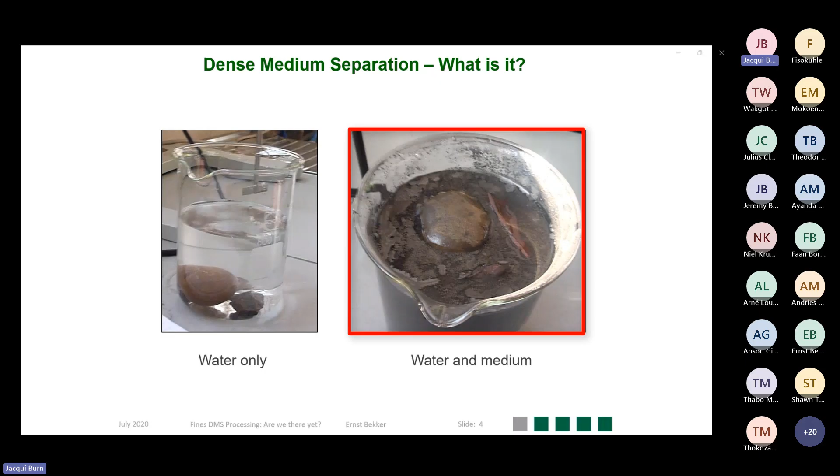Starting off with the dense media separation basics. Dense media separation is where we want to separate heavy material and light material by using a liquid other than water. As the picture on the left hand shows, if you immerse rock in water, it settles to the bottom. However, if you introduce a medium like magnetite or ferrosilicon, it's possible to float the rock as shown on the right hand side.

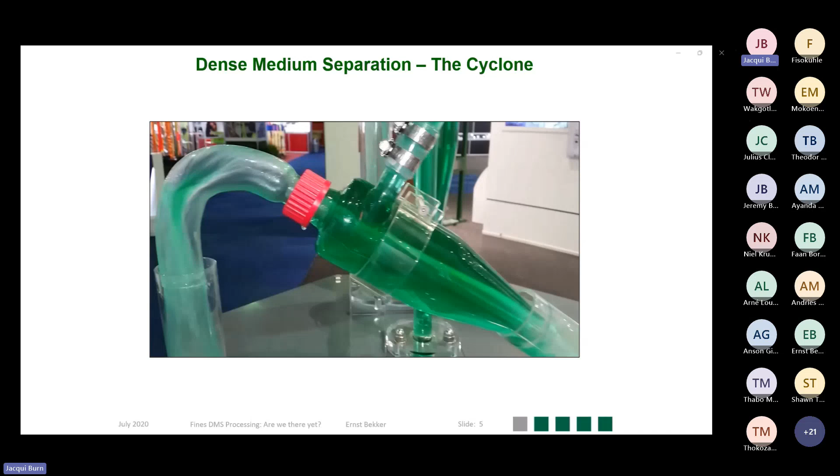In this video, it is an illustration of how the cyclone operates. It's operating on a water-only basis, but inside the cyclone you can see there are some yellow beads, illustrating the amount of time the particle spent inside the cyclone to do the separation. Time is of utmost importance to ensure optimum hydrocyclone performance.

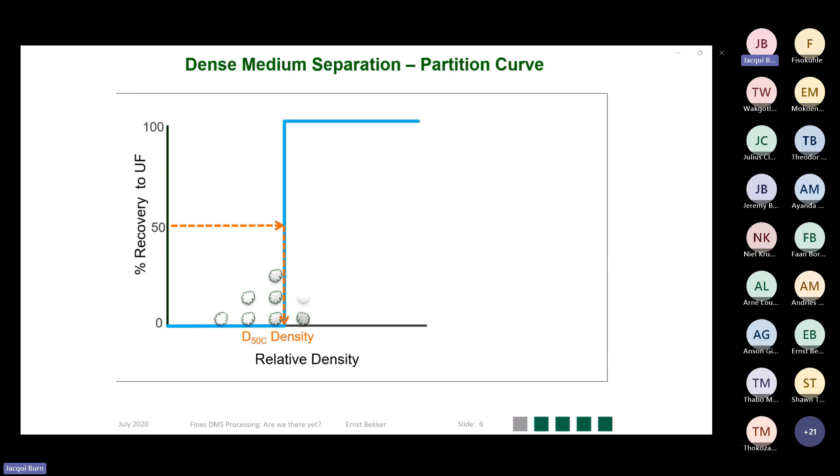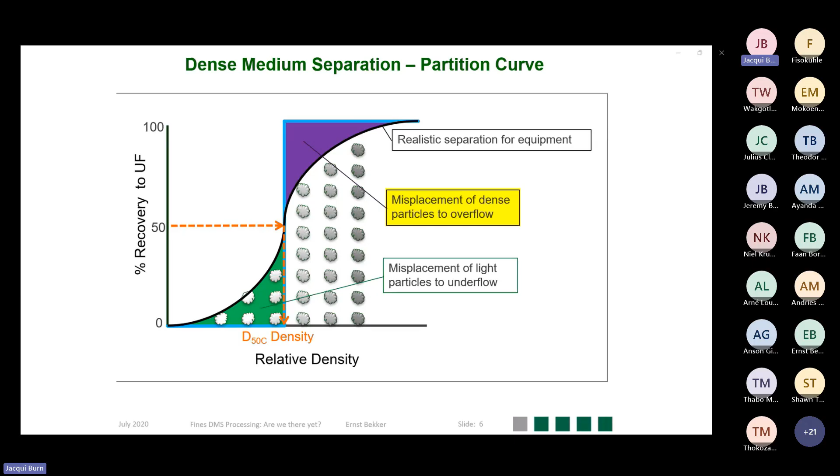Unfortunately, dense media cyclones are not perfect separators. As illustrated in this animation, you get particles that get misplaced, with sinks reporting to the overflow and light material reporting to the sinks. The objective, of course, is to have this S-curve as steep as possible, or to approach perfect separation as close as possible.

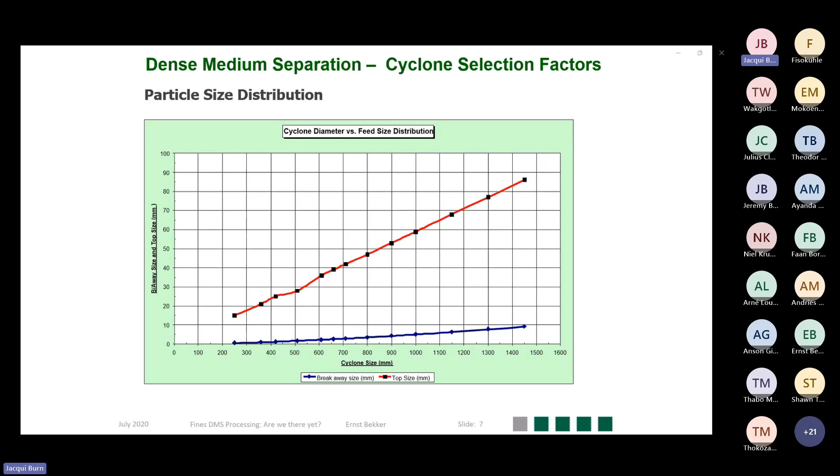In dense media cyclones, one of the factors that play a role is the particle size. There is a top size limitation to ensure there are no blockages taking place, and then there's a bottom size limitation to ensure that we always beneficiate the material as efficiently as possible. The focus of fines dense media cyclones is now on this finer fraction, which is normally not advisable to be treated in large diameter cyclones.

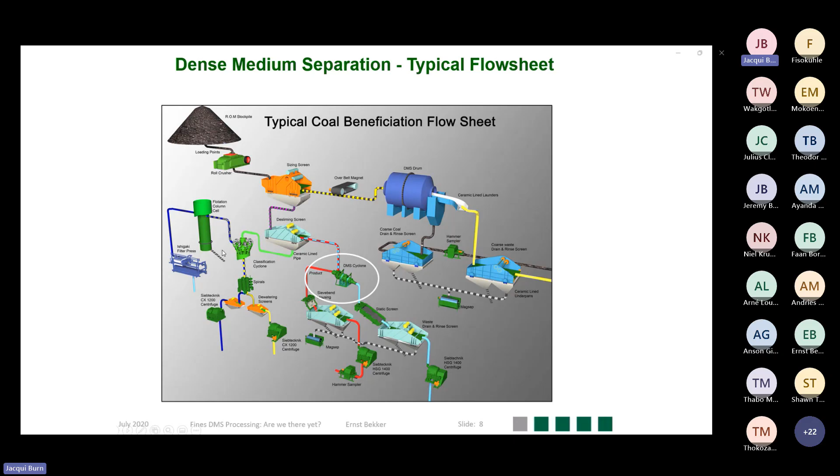A typical flow sheet of a dense media plant shows that the dense media cyclone always forms the heart of the process. On this coal flow sheet, you will see that the fine fraction is reporting to a water-based application, in this example where there's spirals and flotation. The fines dense media separation process is focusing on that territory.

Moving on then to why fines dense media separation. What are the advantages, or why would one do that?

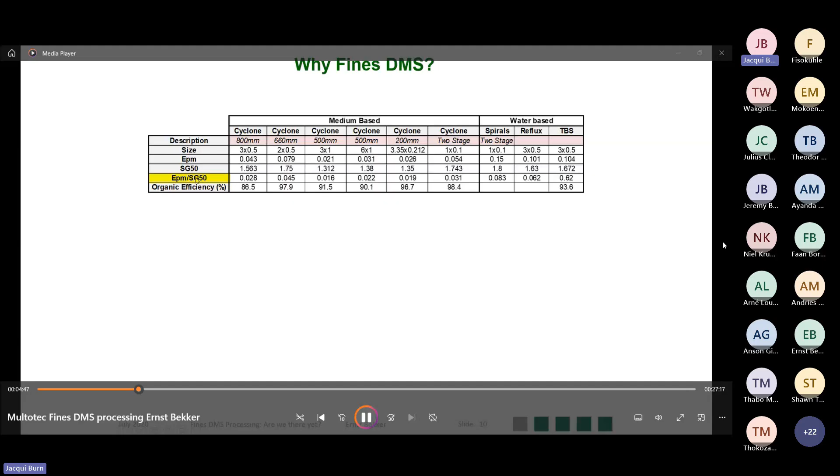The table presented on top of the slide is divided into a media-based section and a water-based section. You will see there is an EP and an EP divided by cut density. The lower the EP value, the better the separation efficiency.

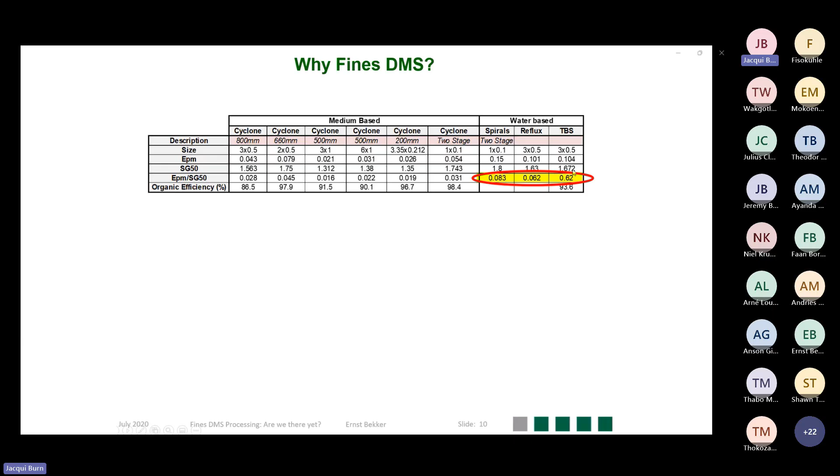If you look at the water-based applications, which is spirals, reflux classifiers, or Teeter bed separators, TBS as they're called, you will see that the EP divided by SG50, normally referred to as the normalized EP, is quite high in comparison with the dense media-based processes.

Why do we want this normalized EP value to be as small as possible? You can get a densimetric ore body where there's very little near density material, as shown on the graph on the left hand side. This small amount of material allows for a poorer efficiency without significant economic implications.

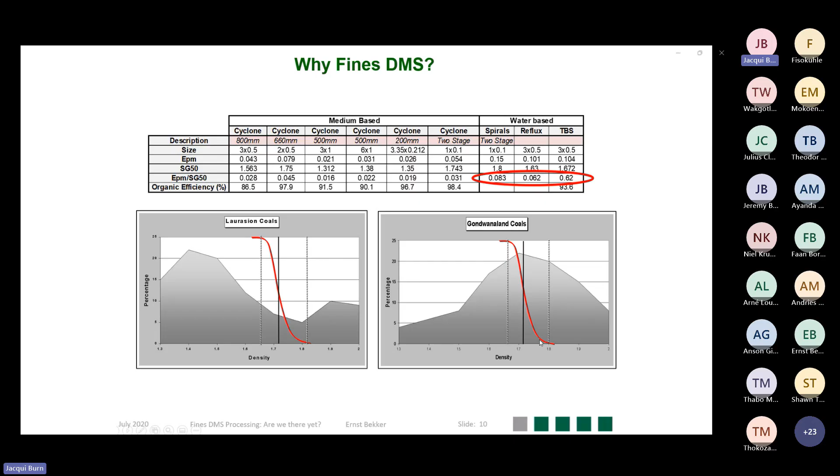However, when you are looking at high near density applications, this S-curve, or the EP value, needs to be as small as possible. That's the territory where dense media, or fines DMS, can play a significant role.

This graph illustrates that the dense media separation process is the most efficient process across a wide range of particle sizes. The particle size is shown on the x-axis, and the normalized EP is shown on the left-hand axis.

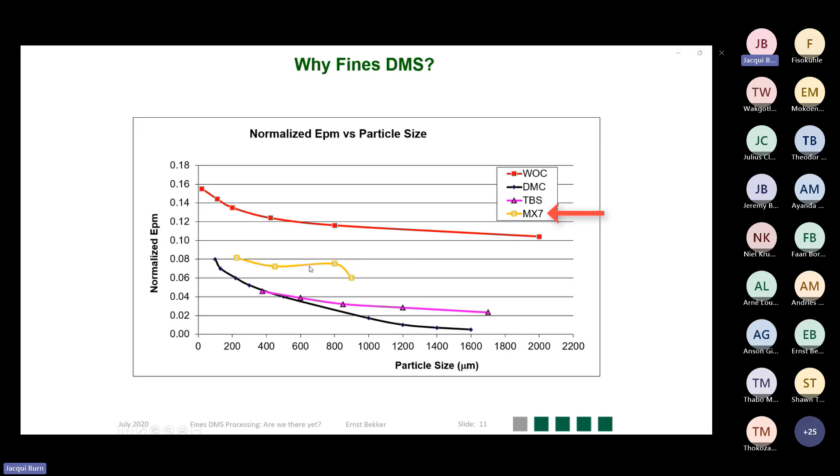So compared to water-only cyclones (WOC), MX7 which is the spirals, and then TBS, the Teeter bed separators, the dense media cyclone performs better.

Next, we move on to some points to consider on fines dense media separation.

First point: what size fraction do you as a client define as fines? Are we talking 3 mm to 0.1 mm? Or 1.5 to 0.212 millimeters? That's the type of information we as suppliers need to be aware of.

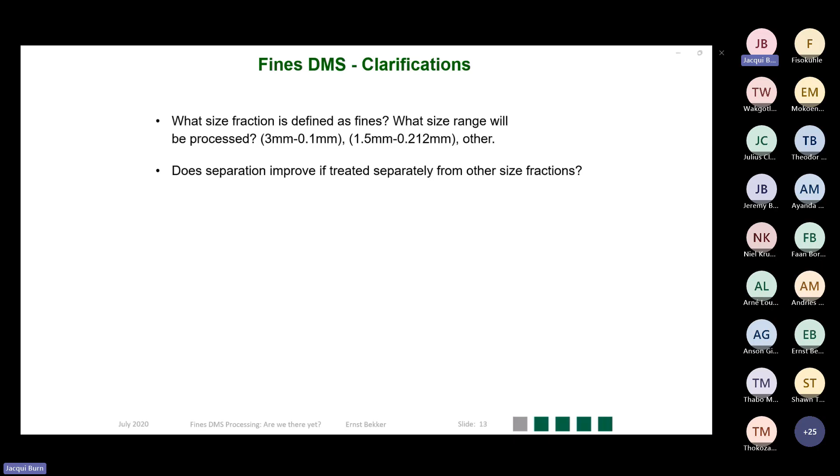Does the separation improve if the fine fraction is treated separately from the rest of the ore body? If so, then there is merit for fines dense media separation. If not, maybe fines dense media separation is not the way to go.

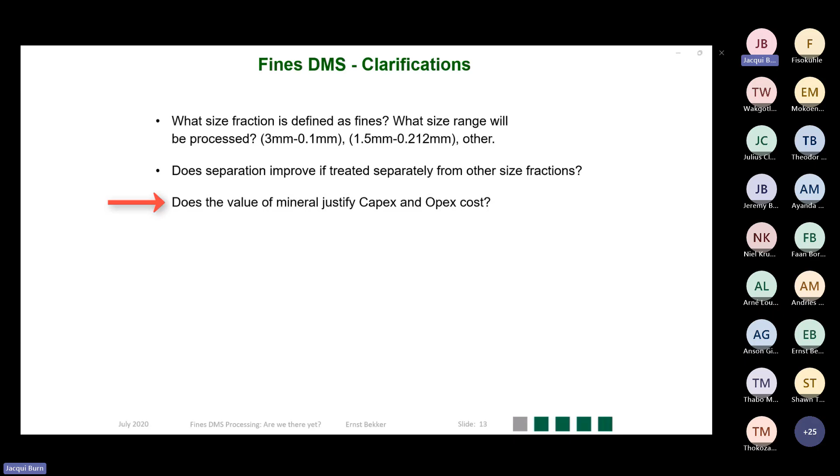Dense media plants are expensive. If there's improvement in performance using only processing fines separately, does it justify the capex and opex required for this plant? What is the expected separation density that one is looking at?

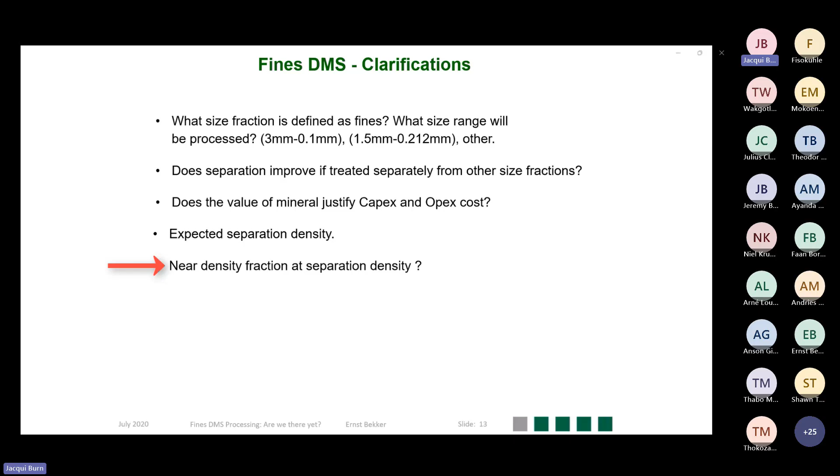The amount of near density material around the separation density - how much is that value? Is there a difference in the particle shape between the coarse and the fines material? Information that we as suppliers need to know.

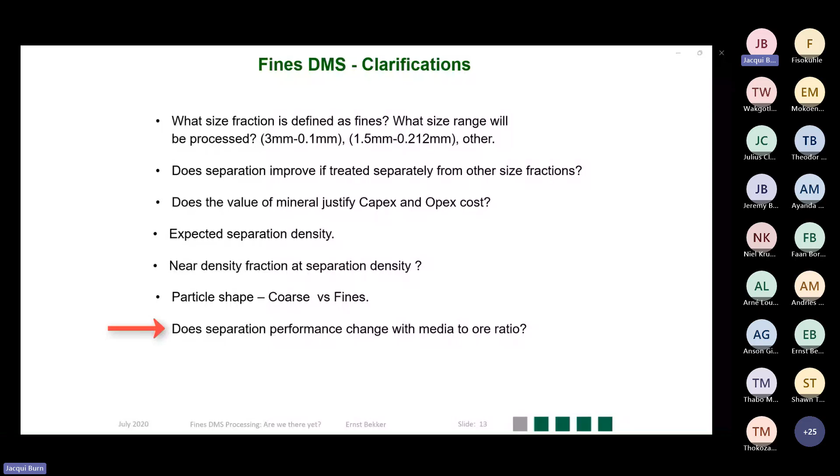Does the separation change if the media to ore ratio changes? If you have that information, make the suppliers aware of that, because that is of utmost importance.

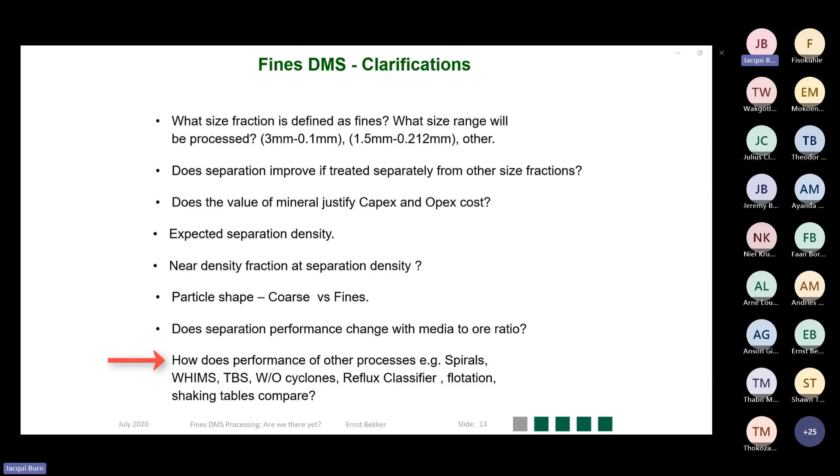And then how does the performance compare against other equipment, like the spiral, wet high intensity magnetic separator (WHIMS), TBS, water only cyclones, reflux classifiers, flotation, and even shaking tables? If some of this equipment produces results similar to the fines dense media separation process, maybe they are the better option from a capital perspective.

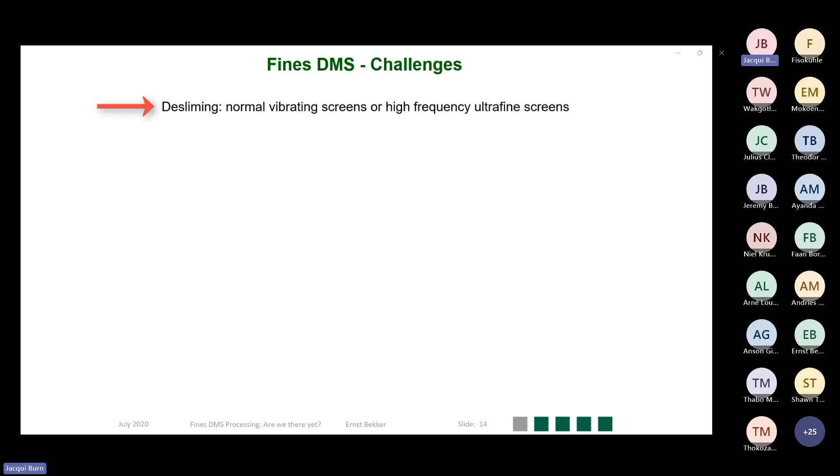Moving on then to challenges that we see so far in fines dense media separation. The desliming activity - most plants currently use normal vibrating screens or high frequency ultrafine screens.

Screens or magnetic separators are used to separate the solids from the media. This is an area where one has to think very carefully, because the screen panel apertures are not always as small as the material processed via the fines dense media process.

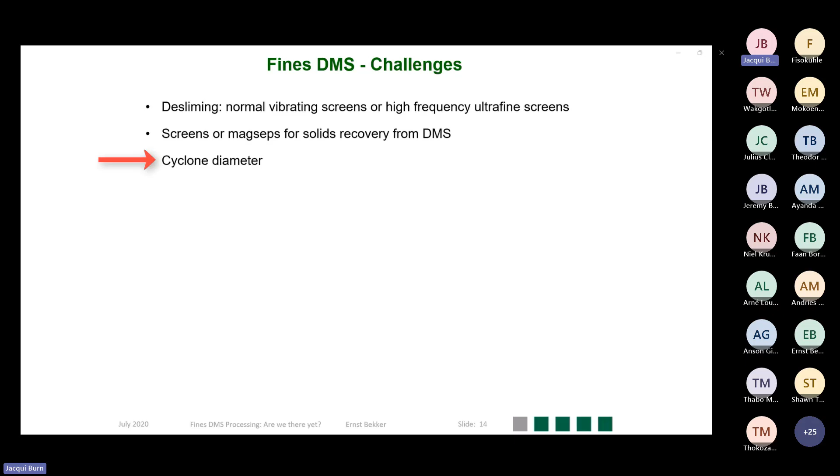Then magnetic separators are a possibility, but if the material is not magnetic, magnetic separators are not going to do the job. What cyclone diameter do we need to use? That's one of the questions always asked in the industry.

The operating head - what operating head do we need to function at? Operating head is related to pressure, and pressure is a function of the media density. So in dense media applications, we talk about head instead of pressure.

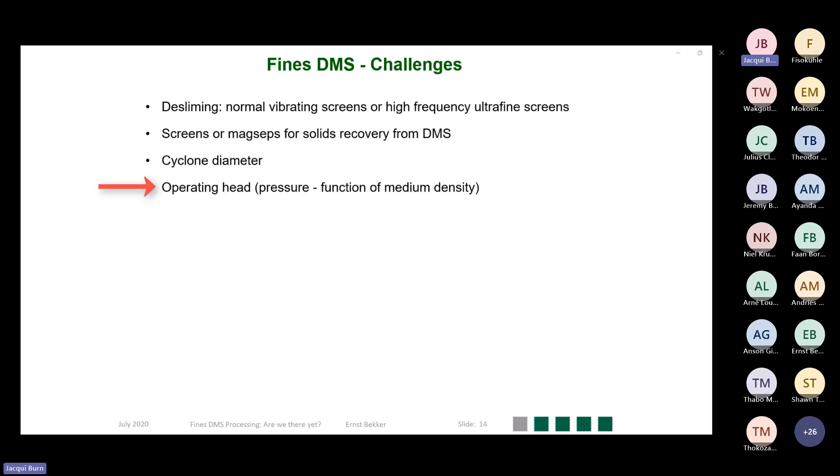What media size and type will be required? What's the fineness of the media that would be the best option? This is information that's not always available up front.

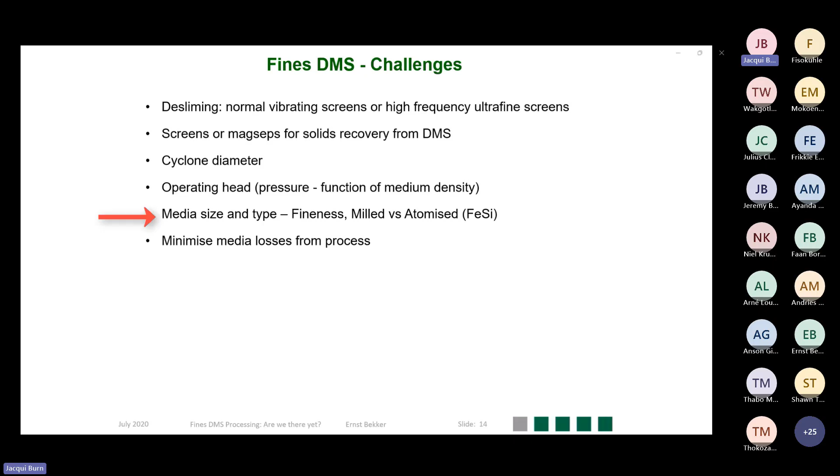How do we minimize the media losses from a fines dense media separation process? The separation density - is it the standard type of density or is it the ultra high density? Ultra high density is defined as densities above SG 3.8 or RD 3.8.

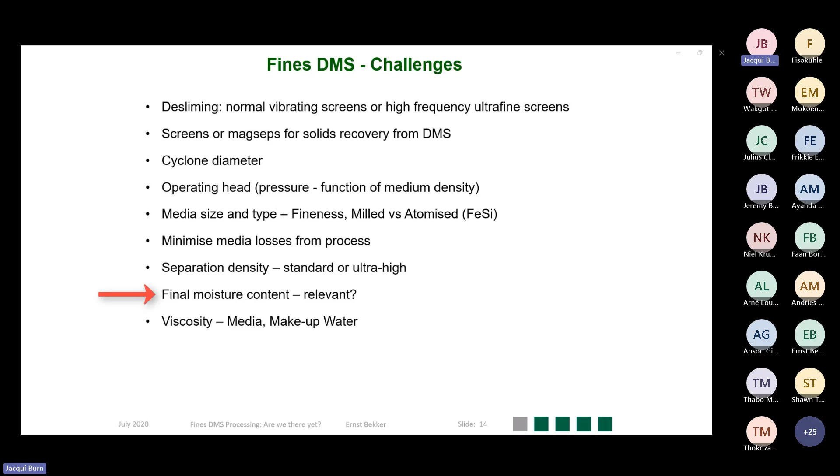Is the final moisture content of the fine material relevant? Viscosity depends on the type of media and also the makeup water. If the makeup water contains some slimes, that can result in viscosity problems, which can have a detrimental effect on fines dense media separation.

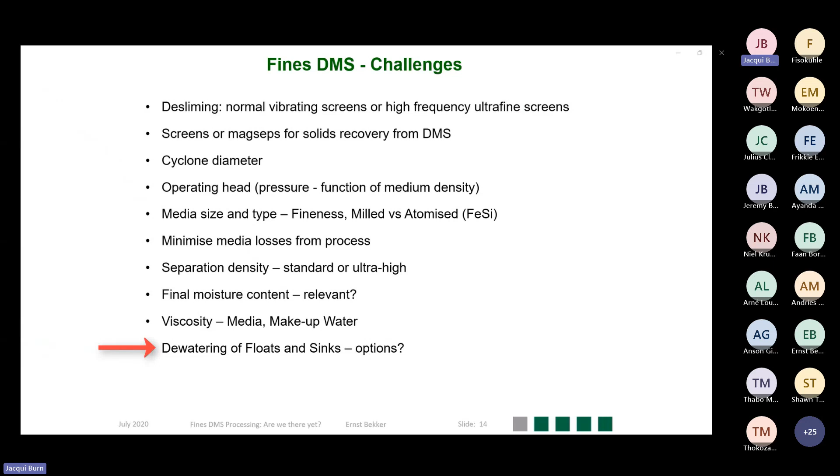Are we going to dewater the floats and sinks? What options exist to dewater that if we want to consider fines dense media separation?

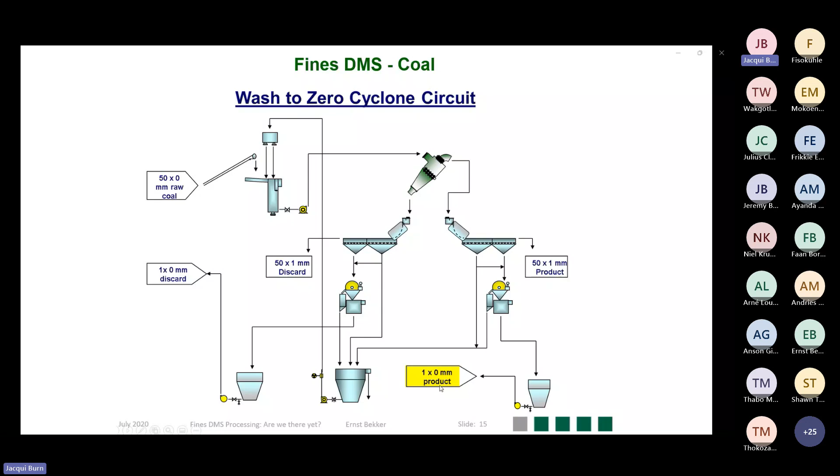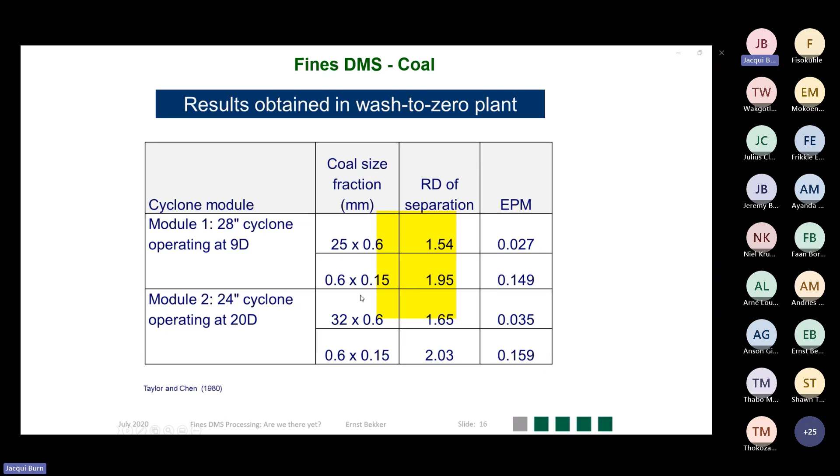The results produced did not look too promising, although we could see that some separation was taking place. If you look at the EPM values, remember the smaller the value, the better the separation efficiency. If we look at the finer fraction, 0.6 to 0.15 millimeters, the EPM values were relatively high, so that was not optimal, but it indicated some separation did take place.

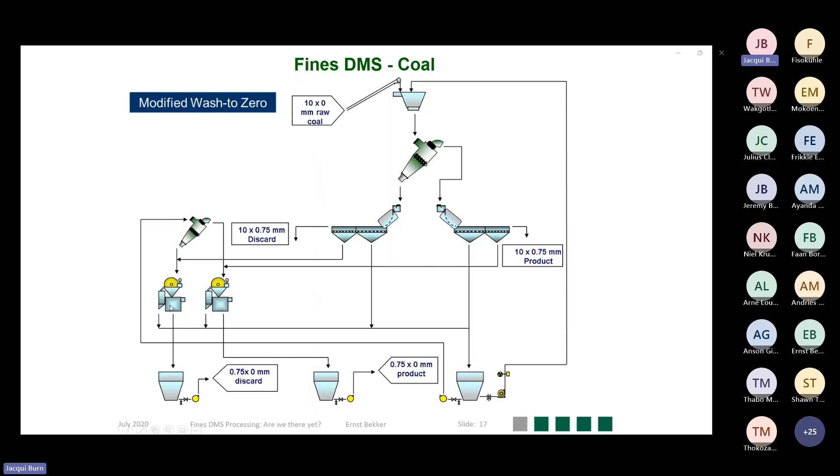There was a modified wash-to-zero process, where the floats of a normal dense media cyclone went through the drain section of the drain and rinse screen into a separate tank and then got pumped to a second cyclone. This cyclone produced a floats and a sinks stream. Both streams went through individual magnetic separators, and the floats magnetic separator effluent became the final fines product, while the effluent of the sinks magnetic separator became the discard.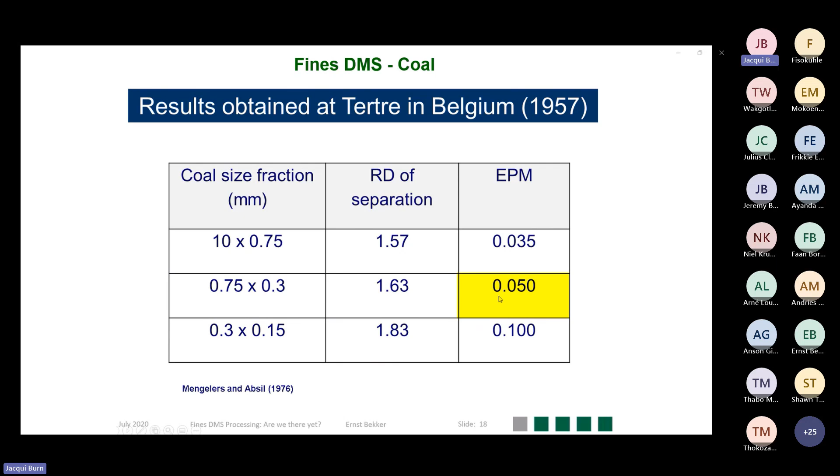This yielded an improvement in the EP values. As one can see, we went from 0.14 down to 0.1 on the fine fraction, 0.3 millimeter to 0.15 millimeters, and 0.75 millimeters to 0.3 millimeters, the EP became 0.05, which is actually quite good.

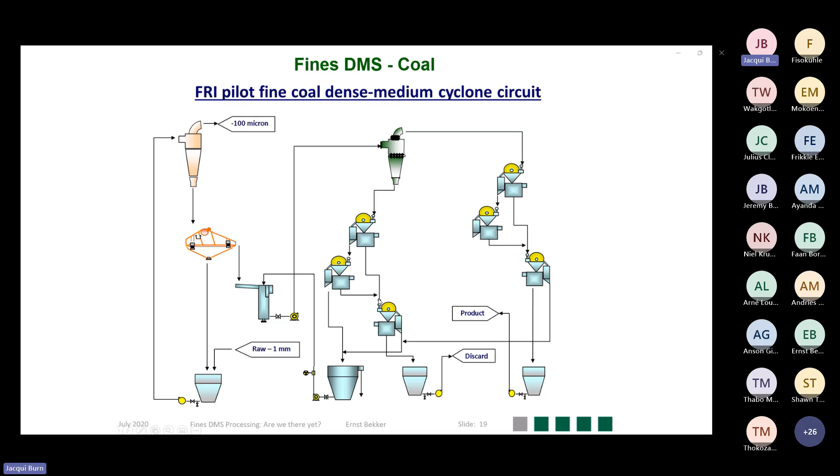The Fuel Research Institute of South Africa then went further and built a pilot plant where -1 millimeter material was introduced to the process. It got deslimed via a hydrocyclone at 100 microns, and the -1 millimeter plus 100 microns was then fed into a dense media process. The cyclone's float and sink sections went to individual 3-stage magnetic separators to produce a product and a discard. The results from the different test runs indicated that very good EPM values could be achieved.

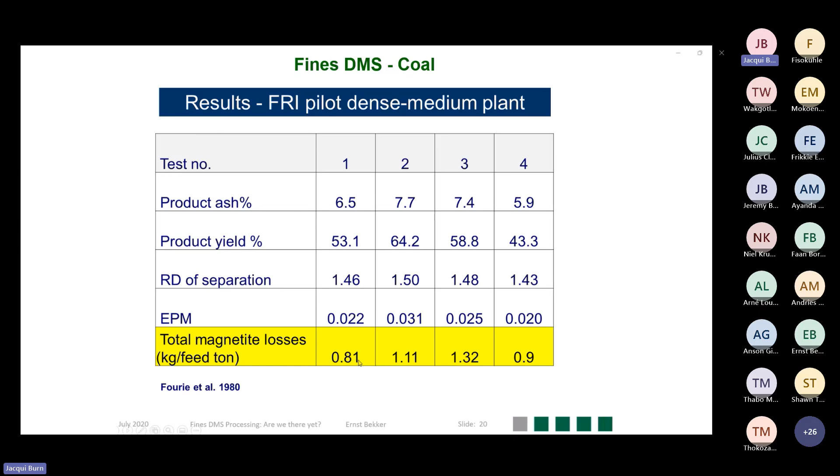Also take note of the magnetite losses experienced on this process. They are quite low, because the standard for magnetite losses in the coal industry ranges between 1.5 kilogram per ton to 0.5 kilogram per ton, depending on the coarseness of the material. So one would expect this fine material to be higher than 1.5, which it is not.

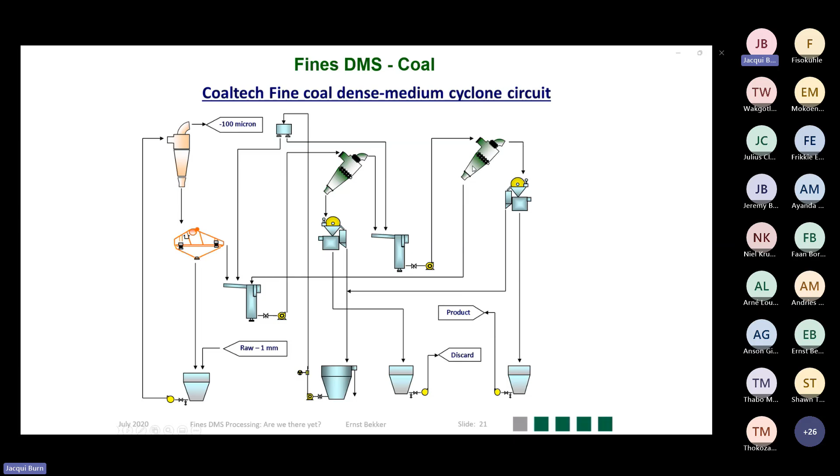Coaltech, a division of the CSIR here in South Africa, developed a different dense media plant. The difference is that it's still the same size fraction treated, -1 millimeter to plus 100 micron, but the difference came in that it was a 2-stage dense media process, where the float section of the primary dense media cyclone got rewashed through a secondary dense media cyclone, and thereby a discard and a product was again produced.

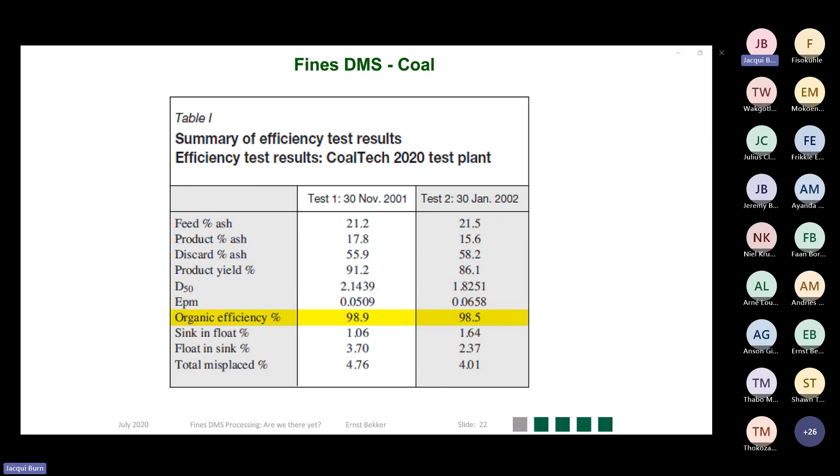The EPM values achieved on this process range from 0.05 to 0.065, which is quite good. What's more significant is the organic efficiencies, ranging from 98.9 to 98.5, which is exceptional for fine coal DMS processes.

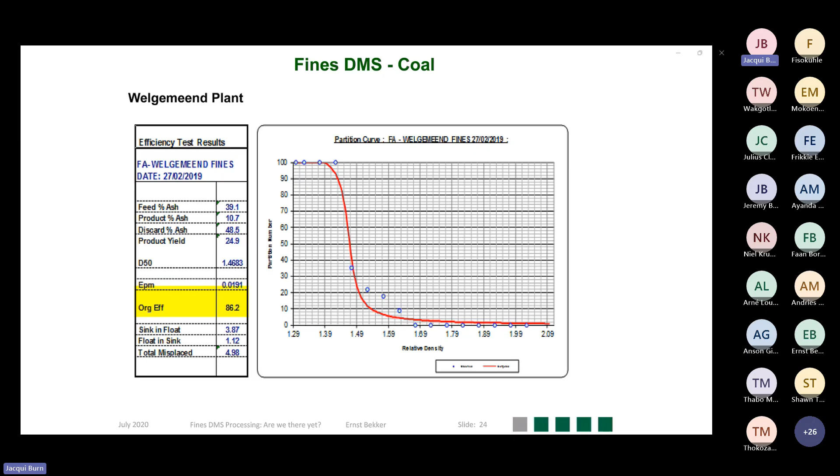The results obtained on this plant indicated EPM values of 0.019, which is very good, and organic efficiency of 86.2%. So in this actual operation, the results obtained indicate that there is room, or scope, for fines dense media separation.

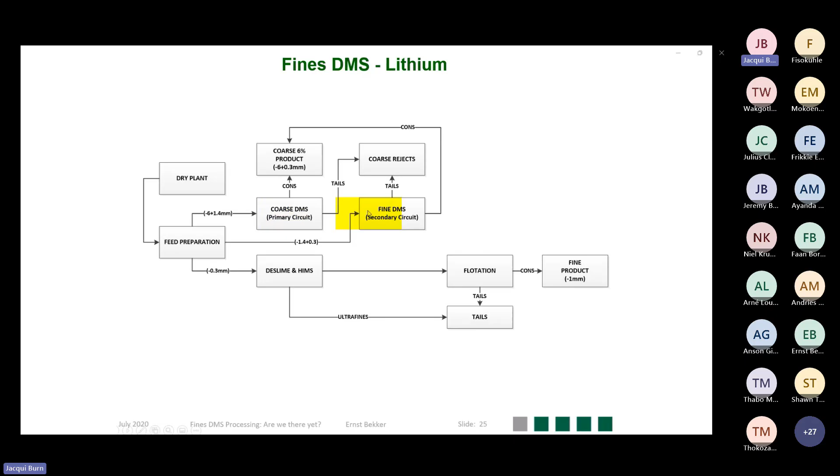It's not only on coal where fines dense media separation is used. Lithium also uses fines dense media separation. In this case, they split the feed between -6mm to 1.4mm and -1.4mm to 0.3mm, separately treated through a coarse and a fines DMS. Iron ore and andalusite are also being used for fines dense media separation. So coal is not the only commodity that at this stage exploits the usage of fines dense media separation.

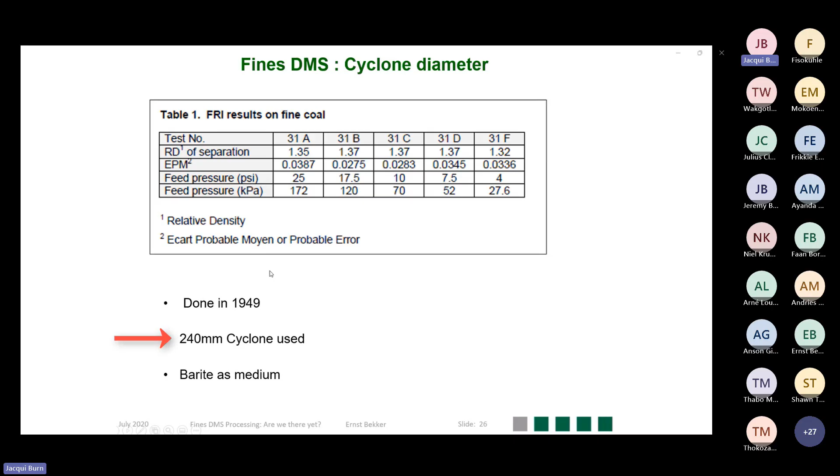Next topic is then the question about cyclone diameter. The Fuel Research Institute results were produced on a 240mm cyclone, and as you can see, EPM values were quite good.

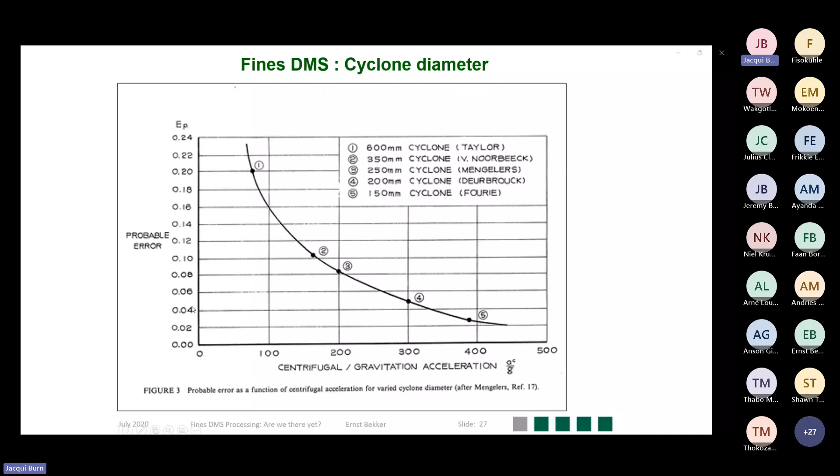Over the years, different tests revealed that as the cyclone diameter becomes smaller, the EPM values become lower. So the trend is to use small diameter cyclones when you want to treat fine material, because that is where the best EPM values are being achieved.

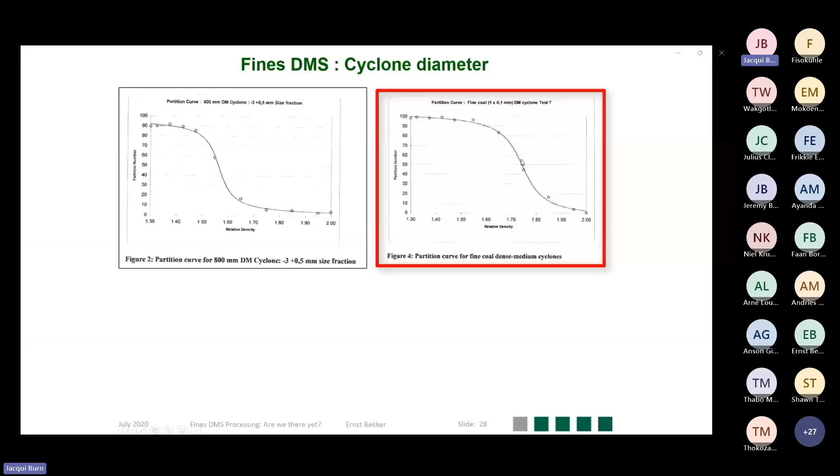Test work done between a 200mm and a 360mm cyclone does, however, indicate that we can maybe not go too small in cyclone diameter. The blue curve illustrates the 200mm cyclone, and as one can see, the larger cyclone produced a better EPM value.

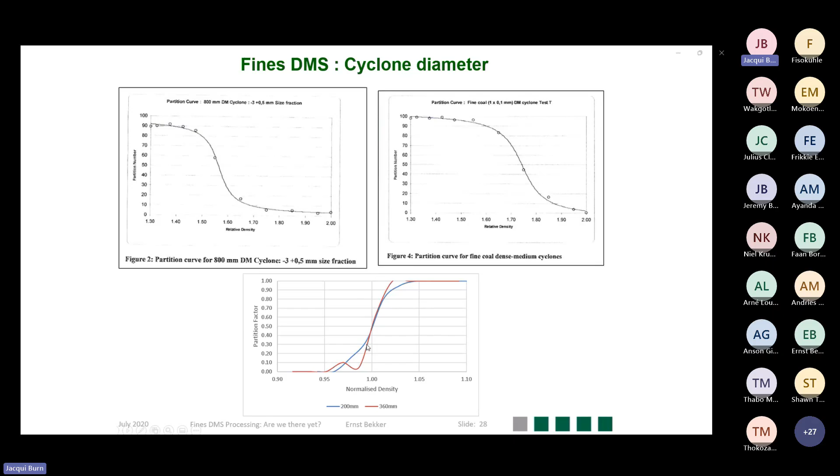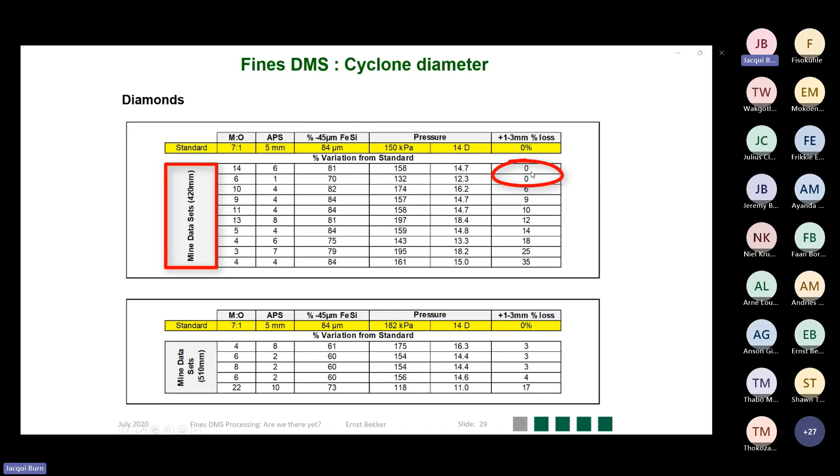In diamonds, they're using 510 and 420mm cyclones. But what is of importance is that on the 420mm cyclone, there were cases where there was no 1 to 3mm diamonds lost, illustrating again that a smaller diameter cyclone gives better efficiency if operated correctly.

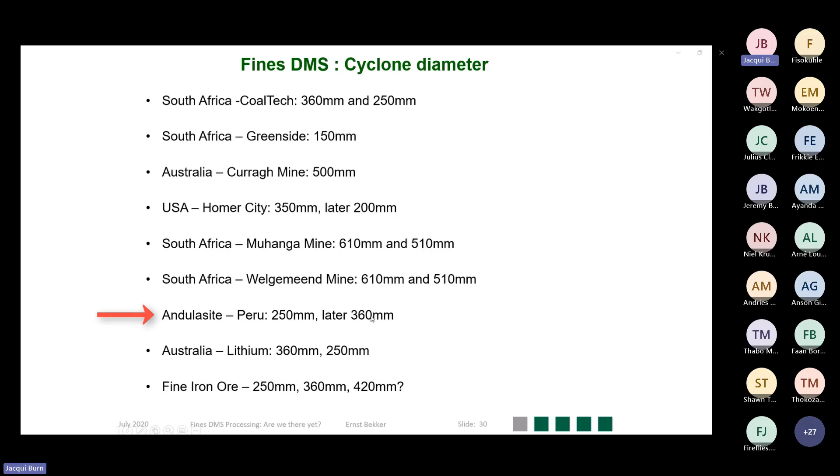So, in summary on cyclone diameter, this slide illustrates the various projects. The CoalTech project used 360mm and 250mm cyclones. In Greenside, there was an operation using 150mm cyclones. In Australia, the Curragh mine used 500mm cyclones. USA, 350, later 200mm. We've now got 610 and 510mm cyclones operating on two fine DMS industrial plants in South Africa. Andalusite uses smaller diameter cyclones again, 250 and 360. Australia, lithium, 360 and 250mm cyclones.

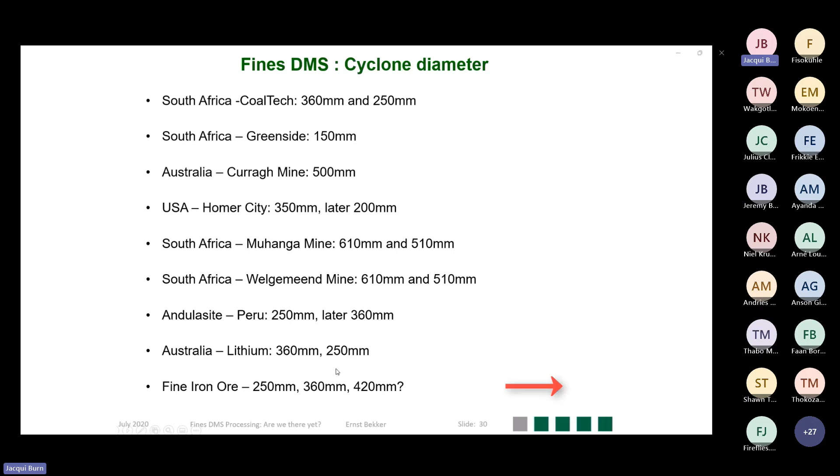And then fine iron ore, 250 and 360mm seems to be the standard. The question is maybe what about 420mm cyclones? So there's a range of cyclone diameters currently being employed or that has been employed on fine dense media separation. It seems that there is no one size fits all.

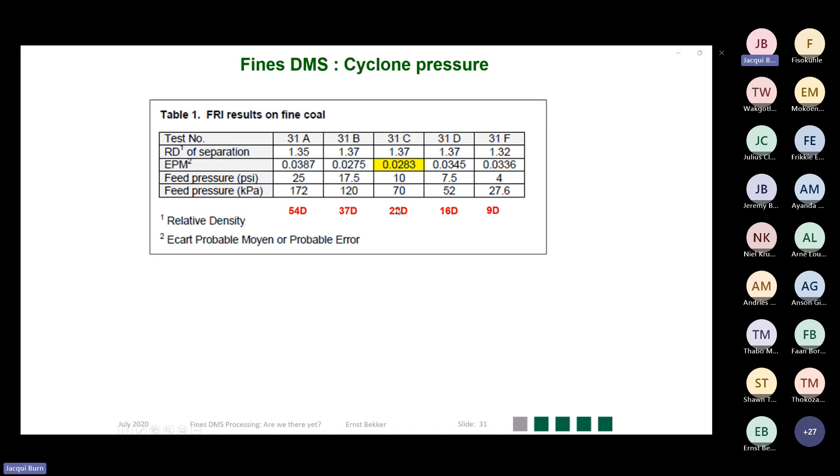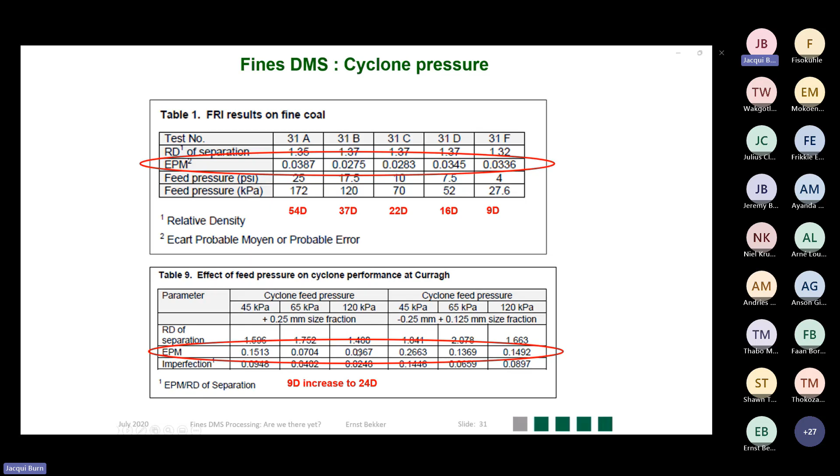Additional test work done at Curragh mine in Australia also indicated a similar trend. 9D up to 24D test work was conducted, and the EP values seemed to improve as the operating head increased.

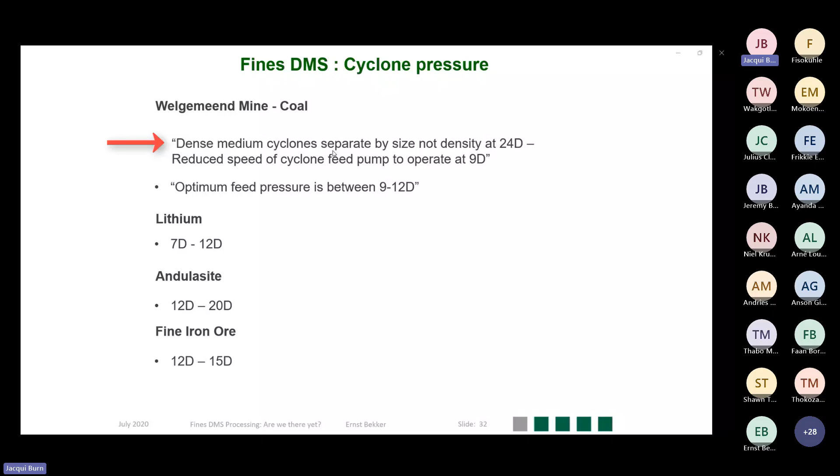On the Welgemeend coal plant, the industrial coal plant currently in operation, the feedback from site is, however, that 9D, the standard operating head for dense media cyclones in coal, seems to be more beneficial than the 24D that people think is required on fine dense media separation. The reason is that they believe the cyclone starts to separate on size at these higher operating heads instead of density. They believe the operating feed pressure should be between 9 to 12D.

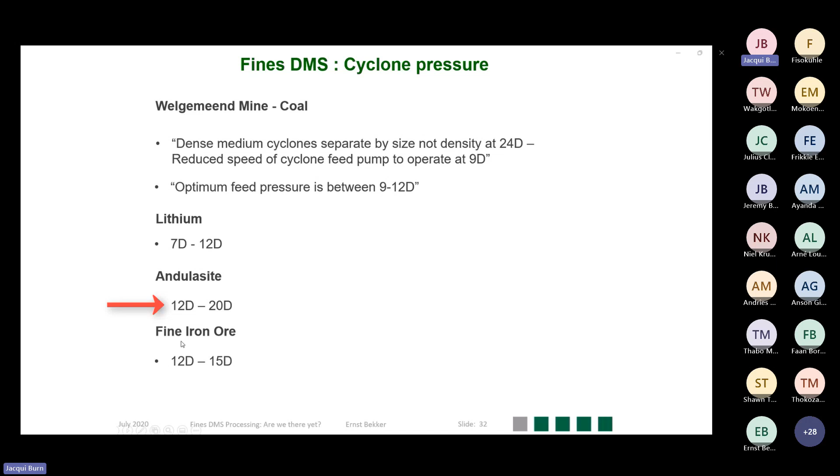On lithium, 7D to 12D seems to be the standard. Andalusite, 12 to 20D, iron ore, 12D to 15D. So earlier test work indicated higher operating heads seem to produce better efficiencies, while as more data becomes available, it seems maybe lower pressures can be employed.

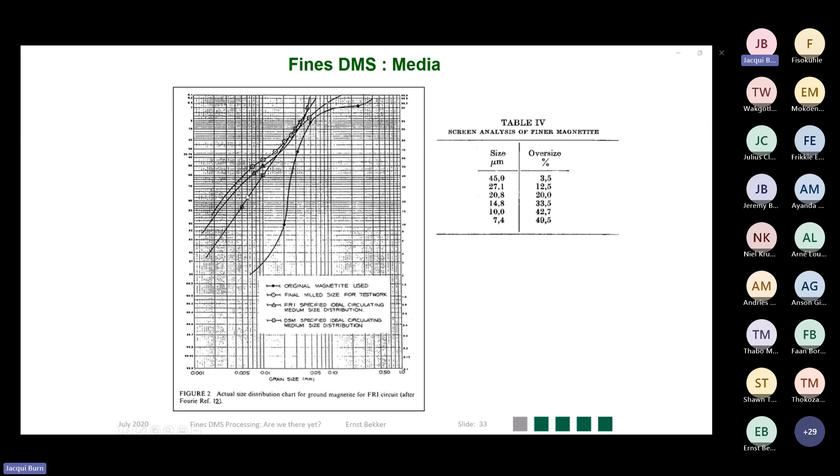Another factor on fine dense media separation is the media itself. The Fuel Research Institute developed their own size distribution on magnetite in the earlier years. On the graph on the left-hand side, one can see what the original magnetite was that was supplied to the process. They milled the magnetite and reconstituted it to form their own type of size distribution, very similar to what was proposed by the Dutch State Mines many years ago.

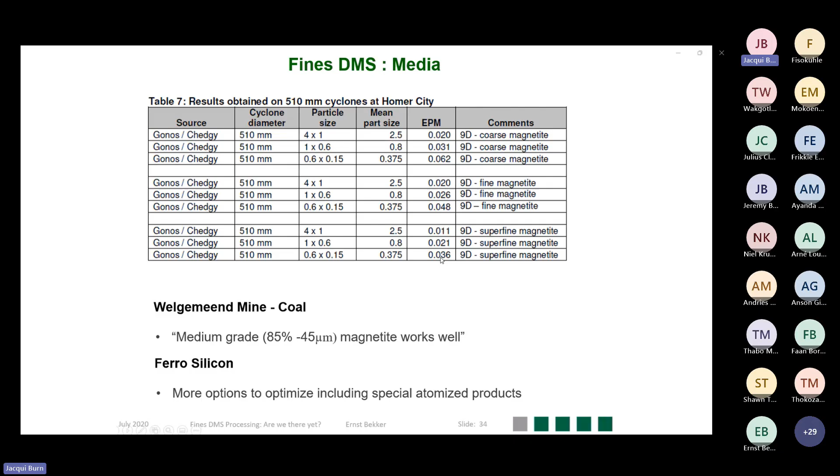On the Welgemeend coal plant, feedback is that the standard medium grade magnetite works well. So again, there's a contradiction. In some applications, a finer media seems to produce better results, and in other applications, the feedback is that the standard media size distribution is acceptable.

On ferrosilicon, you've got a range of media types, so one has the flexibility of changing between fine and coarse media, and that makes it a bit easier. If one finds that one media is not operating correctly, one can switch over to another type of media.

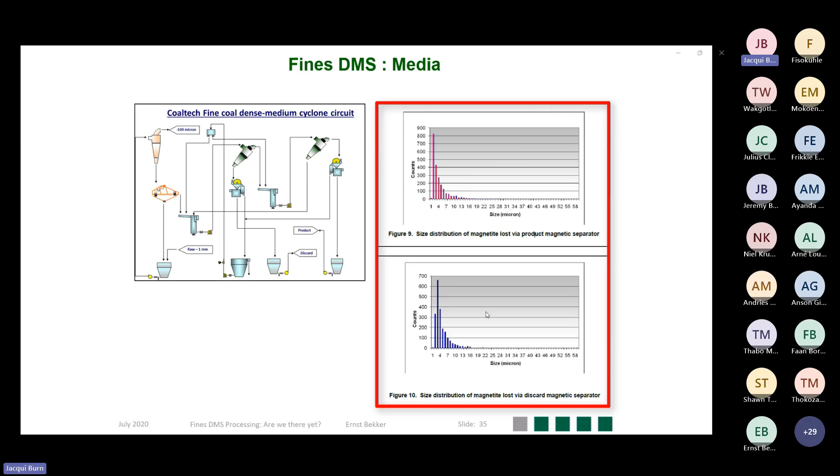Another factor to keep in mind is that the overflow and underflow of the dense media cyclones on the fine processes, especially in coal, now goes through magnetic separators in most cases. And as the graphs on the right-hand side illustrate, both for the product and for the discard, the finer media does get lost from the magnetic separator, as the picture shows, because of entrainment.

So keep that in mind with fine dense media separation. If you go too fine in terms of media, it will, or could, progressively become coarse during operation because of the loss of the fine media fraction.

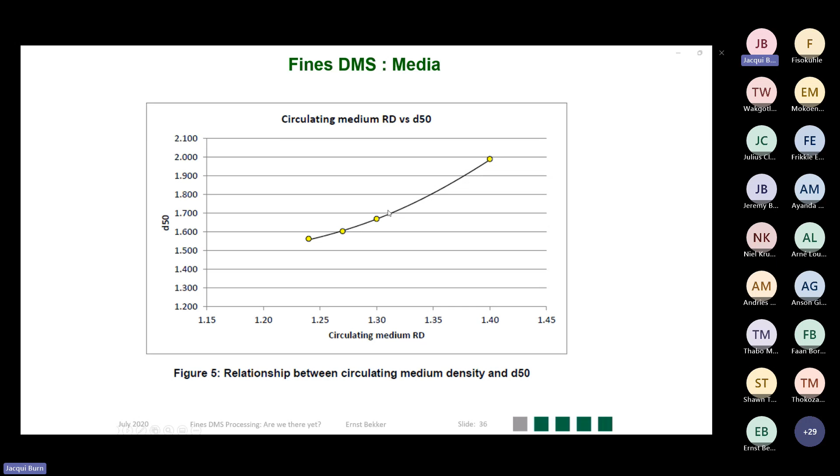That's the circulating media density. As you can see on the left-hand side of this graph, your cut density is significantly higher. We start off at just above 1.55, going up to a density of 2. So it's important to note that there's a big density shift between the operating density and the actual cut density on fine dense media separation.

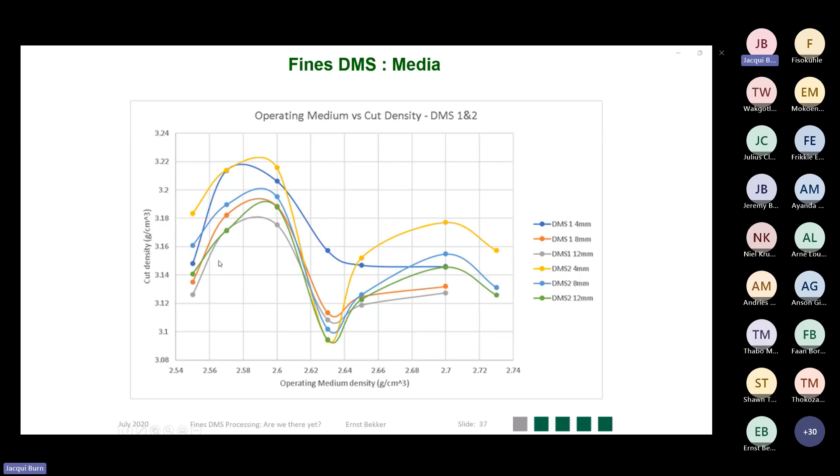Now one can argue that you can just lower the operating density further if you want to reduce your cut density to even values below 1.55. As this graph illustrates, there's a catch. This graph illustrates that as the operating density was reduced from 2.72 to about 2.64, the cut density did come down. But if you reduce the operating density further, the cut density increases again, and that is because of the stability of the media. So there seems to be a limitation of how low we can go with cut densities on fine dense media separation. One of the problems is that we use smaller diameter cyclones in fine dense media separation, and therefore the classification effect on media is more significant compared to larger diameter cyclones.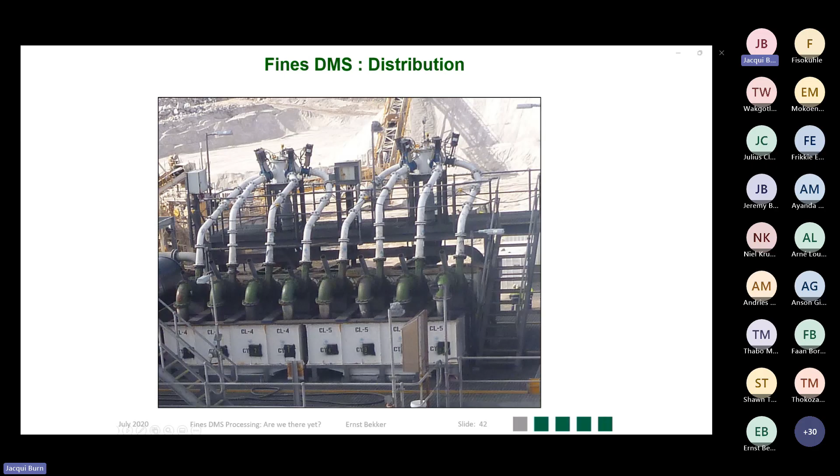There are plants that utilize this concept with multiple cyclones being fed from a common distributor. However, on some of the fine dense media processes, people are feeding a single cyclone. That's where the larger diameter cyclone is coming in. There are no distribution problems that can possibly happen - it's a single feed going into the unit.

So which one is better? Results done on a coal plant where multiple smaller diameter cyclones were replaced with a single larger diameter cyclone showed that going to a larger diameter cyclone resulted in improved EPM values. Test work done on lithium between two cyclones of 420mm diameter compared to a single 610mm diameter cyclone indicated that a single large diameter cyclone seems to produce better separation efficiency as well.

So why would that be the case? Most possibly it's because of the distribution error that can occur using a pulp distributor when the feed pipe design is not optimal. We want as long or as straight as possible feed pipe into the pulp distributor with no bends, and if there are bends, it needs to be as far away from the pulp distributor as possible. But there does seem to be a trend that single cyclones, larger diameter, may provide better results in some cases.

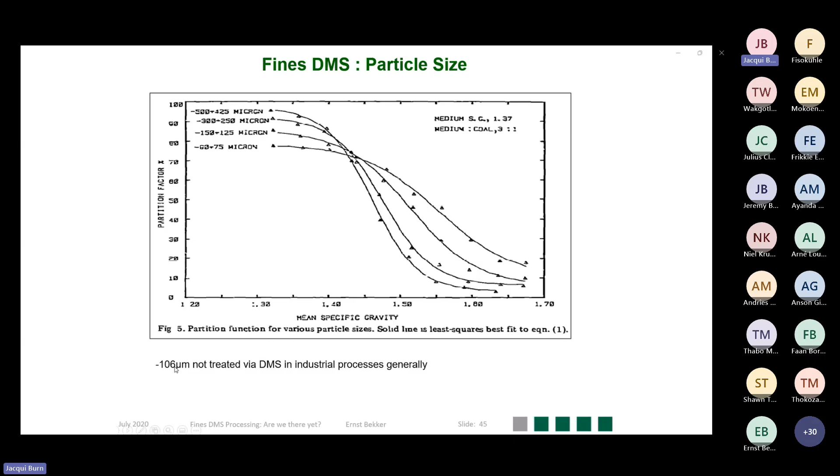Next one is the particle size. What type of particle, what size range do we want to process with fine dense media separation? This graph indicates that there's a limitation - for ultra-fine material, dense media separation efficiency deteriorates as well. So it seems that at this stage the trend is that below 106 microns, that material needs to go to a separate process. This is also illustrated in these two graphs.

The top left-hand graph illustrates the particle size and cut density, and the finer we go, the more significant the cut density effect appears to be. So there seems to be a cutoff where over a certain range we can separate the particles at a similar cut density, and on the finer fractions we are going to separate at a higher density. That could be detrimental for the process.

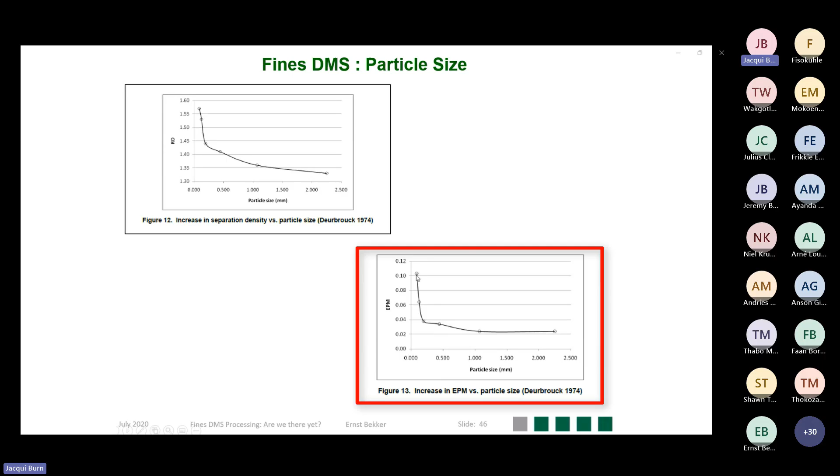Moving on to the EP graph on the bottom right hand side. Fine EP values seem to be more consistent over a certain range up to the finer fraction, and then the EP values escalate, illustrating again the argument to not process the ultrafine material - there are other processes that are more suitable. This was done for coal.

Then there's a question of single versus double stage dense media separation. The Welgemeend plant, which is the operational plant here in South Africa, utilizes a two-stage dense media process.

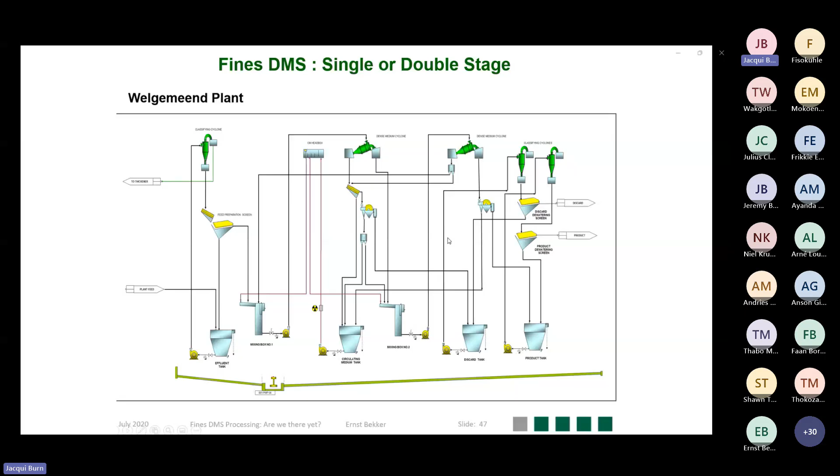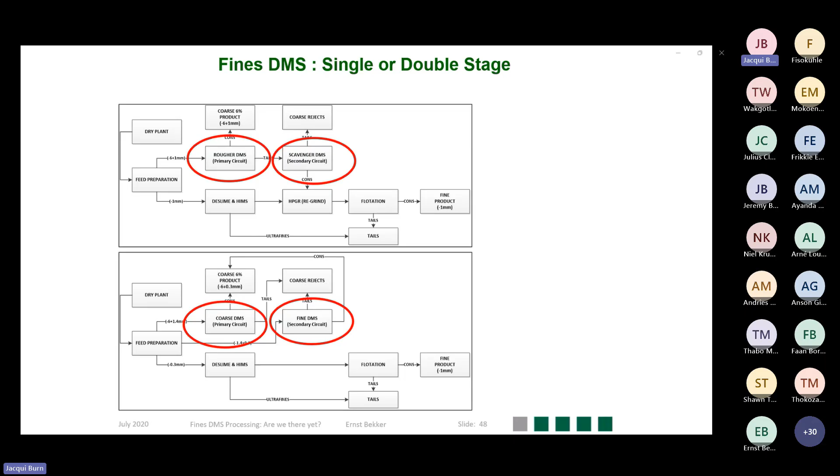On lithium, the standard was using a two-stage process, where you've got a rougher DMS treating 6 by 1 mm material, and then the tails went to a scavenger DMS, which will then reprocess some of the material. There seems to be now a trend that they want to separate the size fraction into a coarse and fine fraction, and then have single dense media cyclones instead of the original two-stage dense media cyclone.

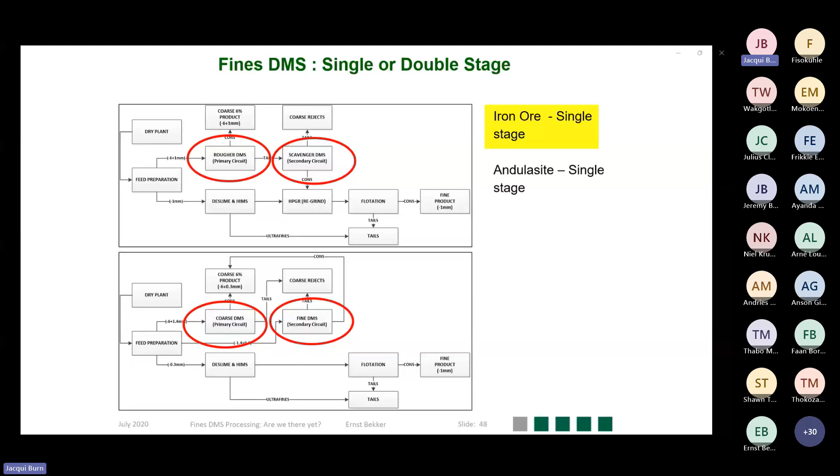The question can be why? I think one of the main answers is the difficulty of operation. Operating a two-stage dense media process is a bit more complicated than a single-stage dense media process, and if you don't get it right, it defeats the objective. Then single-stage DMS process is more acceptable. Iron ore and andalusite also utilize only single-stage dense media process.

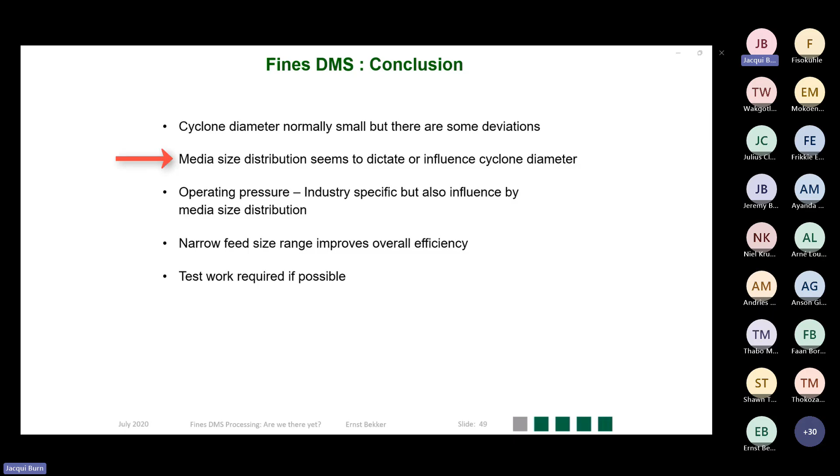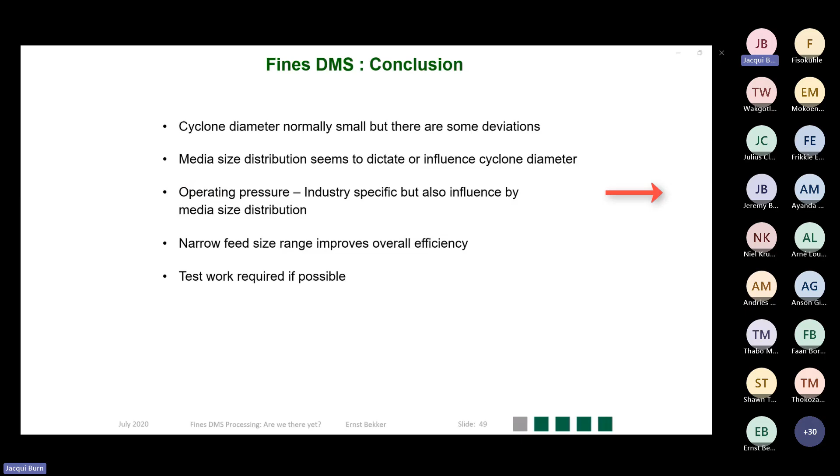So in conclusion, normally the cyclone diameter is small, but as you can see, there are some deviations. The media size distribution is important, but it also seems to influence the cyclone diameter and operating head. Operating pressure, there's no certain standard at this point in time, but it seems that there are some industry guidelines, and that is what we as suppliers use at this point in time. But the media size distribution does play an important role, and if we as suppliers are aware of that, we may deviate from the industry standards.

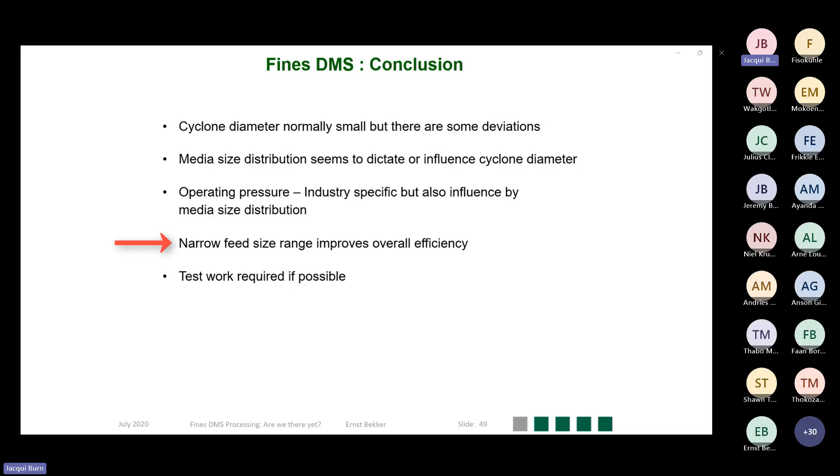Narrow feed size range seems to be the optimum option for processing fines in dense media separation. That seems to provide the best results. And then test work - the more test work is done up front, the more accurate the answers will be.

So the slide started off with the question, are we there yet? And the answer is not yet. We know a lot, but there still seem to be some factors that deviate from process to process, and there's more to learn. Thank you.